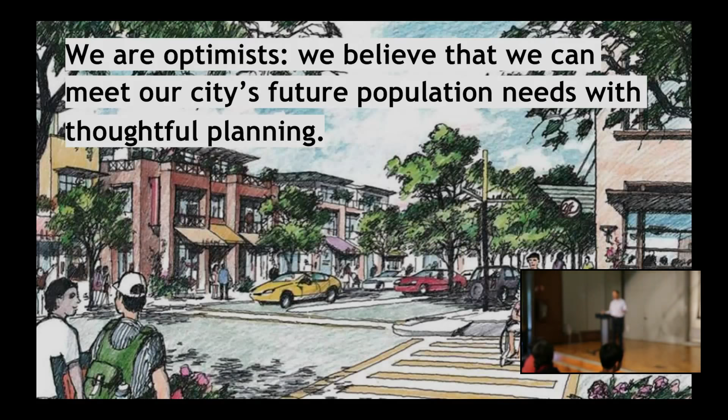So next, this is what we're going to talk about. Let's go forward beyond this. I just want to walk you through who we are. It's just a group of people from Palo Alto. We're optimists—we think that we can meet the future population needs with good planning. So again, anyone here that wants to get involved, is interested in an ADU, but also interested maybe in the broader environment, we are just a group of citizens that work on these things, and we think that there are solutions.

Go 2 more slides. 1 more. It's all right. So we host a lot of educational events. We host various forums, and we talk about policy. And finally, we're everyone—if you think about who's on our board, and I encourage you to go to our website and look, there's people that are retired, there's people that are just starting out, there are people who are really trying to figure out how to get their kids to stay in town, there are people thinking about how to start their own families and what kind of community they want to be part of.

So the final thing I'll say before kicking it off to the meat of this presentation is, when I was on the Planning Commission, this was an important topic. People that come to speak represent a lot of different views. Some are worried that the quality of their neighborhood will be decreased by having ADUs, more people. Some are excited because it might mean they can stay in place, or their kids can stay in place, or there's more variety. But it all happens because people show up and talk at council and talk to the PTC.

And so my final plug is, council was supposed to have brought this to their chambers this week. It didn't happen—there was too much stuff on the agenda, but it'll happen soon. So for those of you here who are interested in ADUs, everything from parking requirements to impact fees to tax assessments, all of this will impact the ability for people to actually get this done.

And so to the extent that you have opinions about this, you should make your voices heard. That's how things get done here. So I just encourage you to be part of this process. So if you signed in, we'll keep you informed as these things go to council or other commissions and where they're going. So with that, I'm going to hand it off to Amy, who's going to kick off our festivities.

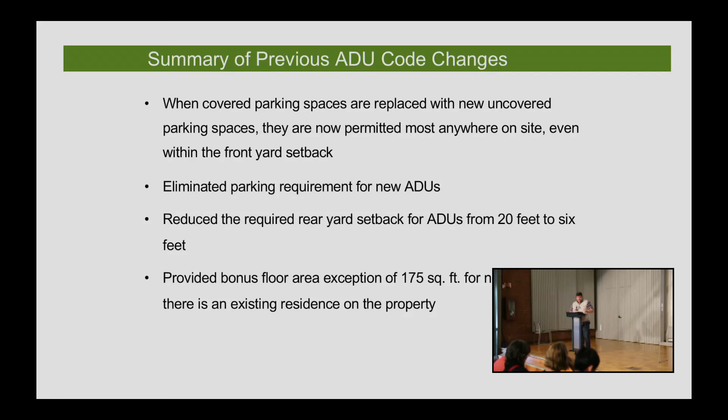A few more changes here. Significant increase in ADUs, these are the trends that we've seen since all of those changes were made. Since those changes were made about 15 months ago, we've seen 62 permits for new ADUs. Prior to that code change, we only saw about 4 new ADUs per year, and now we're seeing about 4 per month. That's about 48 new ADUs per year. So the increase has been pretty dramatic.

We don't know if this is going to continue at this rate. It might just be people that wanted to do it couldn't do it before, now the code changed, so they're jumping in on it. But hopefully this is a trend that continues.

So there were a number of clarifications that staff was looking for council to make as a result of all those code changes that took place last year. Those changes were supposed to go last Monday night, but unfortunately they didn't have a chance to get to it. But I'm going to cover for you what those changes are. There's a very detailed staff report that's available online that was on the agenda for last Monday night, and you can look at that, but I'll cover the highlights here.

So one of them was to clarify that ADUs may be established in all zone districts that permit single-family use.

Russ, we can't hear you. Oh, sorry. How about this? Better? Fantastic. All right. Better?

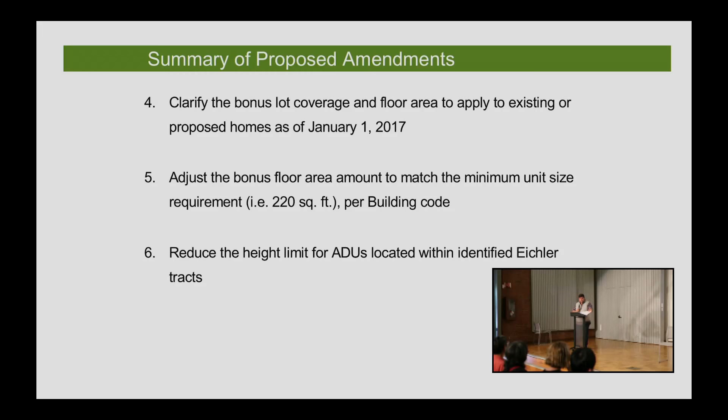Item number 7. So clarify that replacement parking provisions also apply to JADUs. Currently, the code is a bit ambiguous as to whether JADUs can take advantage of the same provision to eliminate the reparking that regular ADUs get to do.

And item number 8 is to allow replacement parking to be located within driveways located in a street side yard setback. The state code basically says that if you eliminate your parking, you can put your 2-space parking requirement anywhere on the site, and our code specified within the front yard setback.

But what about corner lots? A lot of times their parking is accessed from the street side yard. So we are looking to council to also include that specific language that someone could park in their street side yard versus only allowing them to put their parking spaces in the front yard setback.

Item number 9, allow existing driveways to be expanded to accommodate replacement parking. Currently, the language says that you can eliminate your covered parking and put your required parking spaces in the setback, but it says it has to be in an existing driveway.

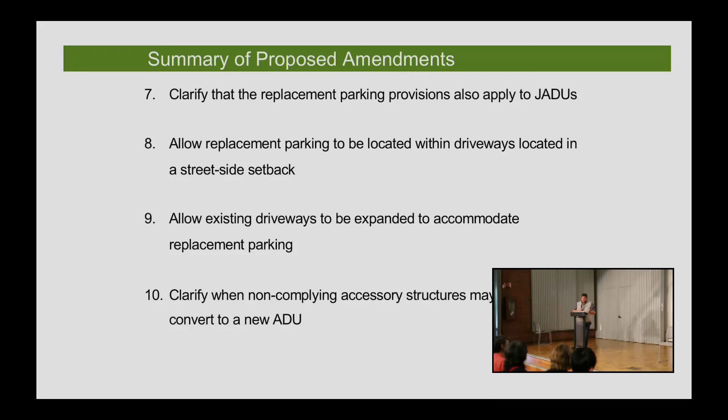Well, sometimes those existing driveways may not be wide enough or long enough to accommodate your parking, and so someone could do a workaround and expand their driveway before they do an ADU and then come back and have the space they need, or we could just amend the code and say that you can make your driveway work to accommodate your required parking. So that's the road we're trying to take, and hopefully council will go ahead and approve that.

And then item number 10 is clarify when non-complying accessory structures may be rebuilt to convert to a new ADU. So currently the code allows you to take a legally built accessory structure, such as a garage, a home office, a rec room, whatever the accessory structure may be, as long as it's legally built, it allows you to turn that into an ADU.

Many of these structures were built long ago and they do not meet current building codes. They can't be used as a dwelling unit without significant modification. Oftentimes that modification actually results in the complete demolition of the structure because it has to be replaced. Currently under the code, if you remove the structure, you can't put it back in the setback. You can't reestablish any height, floor area, setback issues that may have currently existed.

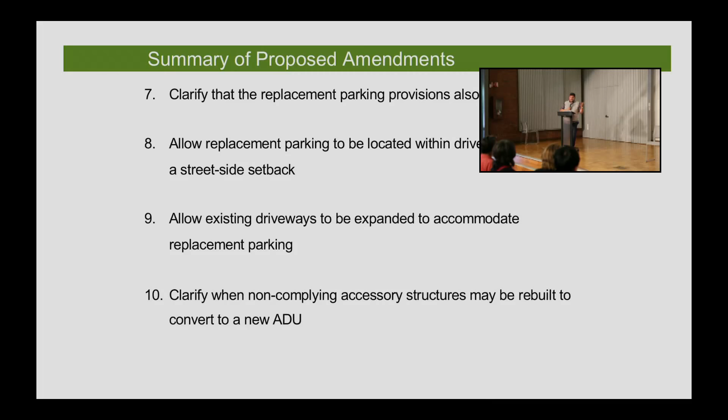So there's a conflict between this provision to try to encourage ADUs within these existing structures and the code that basically wouldn't allow you to put it back the way it was before. So we're trying to get clarity from council that they would allow people to go ahead and reestablish whatever nonconformity that accessory structure had, again, providing it was legally built when it was originally established.

Some other things that we're asking council to look at. The development impact fees for new housing can be fairly steep. For an ADU, it's about $10,000. So they're looking at ways to possibly waive or reduce those fees, and one of them was possibly putting a deed restriction such that you don't have to pay the fee, but then you have to subject the new ADU to being in an affordable housing program for a certain period of time.

Another option was to partner with an organization that can provide the funding, but again, in exchange for having the unit be in some kind of affordable housing program for a limited period of time.

Another item of discussion that people have brought up was, there are a number of illegally existing ADUs. People have built these ADUs in the past, or they buy properties that the former owner had converted either an outbuilding, a garage, or some other space into an ADU. And again, we're trying to encourage new housing, so we're looking at guidance from city council.

It's like, well, are there strategies that we could employ to potentially legalize or allow people to legalize those structures that are currently illegal? And there are different ways of looking at doing that through home improvement exceptions or some kind of discretion from the director to possibly allow that to happen.

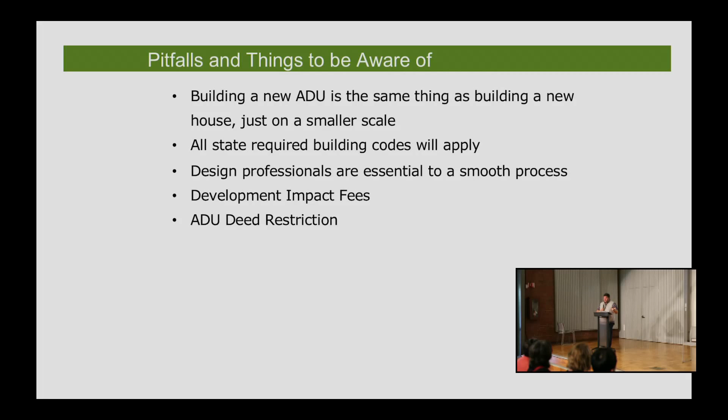That's basically my presentation. I'm assuming there may be some questions, so if you have questions for me, please let me know.

What's a JADU? So a JADU is interesting. We haven't actually seen one in the 15 months that we've been applying the new ordinance, but it basically entails the conversion of an existing room, a bedroom within a home. It could entail other rooms. J stands for junior, so it's a lesser or smaller ADU.

You don't have to have the bathroom in the unit. You can have a doorway from the JADU into the main residence where the bathroom would be. So the size, the fact that the bathroom doesn't have to be a part of it, and the fact that it has to comprise the conversion of an existing bedroom within the main residence, are some of the key points that distinguish it from a regular ADU.

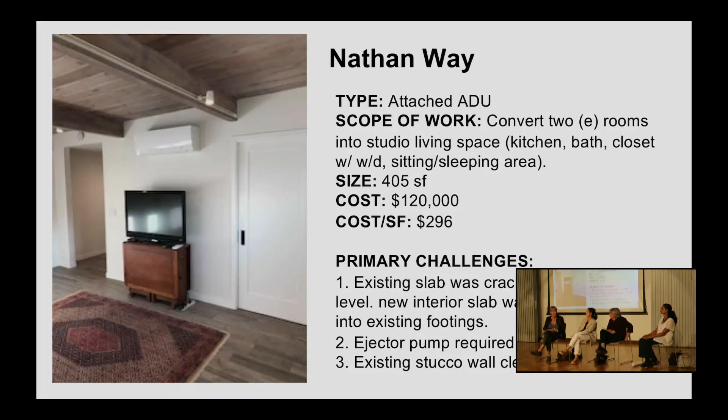The project that just started building, the 872 square foot detached building, is very much like building a house. I mean, it is a whole house - it's a kitchen and a bathroom and a bedroom and a living room and a little office and a storage area. And we are hit with green building, Cal Green Tier 2, yeah. That's the one that's starting now. Tier 2 means an outside consultant.

There's a Santa Rita Avenue? No, not Santa Rita, this is one that's in the design phase - it's the Cerrito Way.

That's a trapezoidal shaped lot, so that was tricky. But there was really only one place for this detached ADU, and that's where the old detached garage was. So we've torn that down, and this is where the ADU is going. But our other big challenge was the trees - the whole thing is under a canopy of a protected redwood. The property has redwoods on two sides, so that made our arborist critical in explaining to the city how we were going to protect the trees, the roots during construction, everything like that. Very grateful to Rob Weatherall of Advanced Tree Care, great guy.

The other problem we've had with this, and this is a problem I'm hoping is going to be addressed, is that most heating systems now come with air conditioning included, whether you're doing a heat pump or mini split kind of a thing.

When you're doing a detached unit, it's in the rear part of the property, and we're not allowed to put air conditioning condensers in the side or rear yard setback, which is tricky if your entire structure is in the rear yard setback. So I'm hoping that there's going to be some relief on that maybe.

Maybe Russ has some input on this. This is a really interesting scenario that you brought up. I've actually made an executive decision, and I've been approving the equipment as long as it's not in the 6-foot side yard setback for an ADU. I've been allowing them if the entire structure is in the 20-foot rear setback. If there's a portion of the structure that is not in the 20-foot setback, then it's expected that the equipment will be located adjacent to that point of the structure. But if it's wholly in the 20-foot setback and there's nowhere else for it to go, then I've been approving that.

The other thing that hasn't come up is that surveys are often required for these, because Palo Alto has become much more rigorous about requiring surveys when you're doing anything close to a setback. In this case it would be 6-foot setbacks, but it's happening in additions to main residences also. Used to be, if the fences were in good shape, they were kind of assumed to be the property lines. But nowadays more surveys are being required, which can be a $3,000-$4,000 item. So there are soft costs associated with all building projects, but some of these ADUs get hit with all of them.

It's expensive. And next we're going to talk about the Santa Rita project.

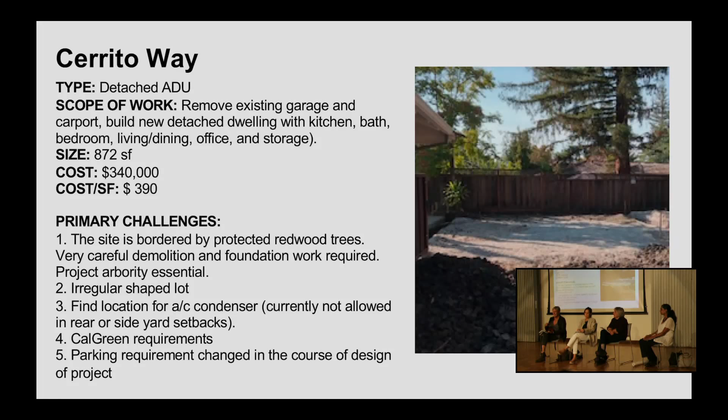The Santa Rita project is a house and garage built in 1928, with a little detached Tudor-style garage. It's only 270 square feet, and of the projects, it could actually end up being the most expensive on a per-square-foot basis because it's a lot of bathroom and kitchen—which is expensive square footage—compared to the amount of just walk-around area. But we're just in the early stages of that.

We'll have an air conditioning unit problem, so we have to deal with where we're going to put that. But it's got a high roof ceiling, so we can put some skylights in. It'll be a cute little space, but the other ones are more usable for living.

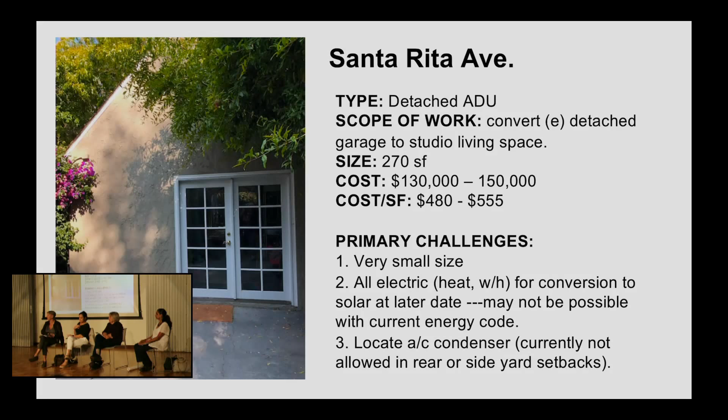Thank you so much, Kristen. That is just so much information that you shared with us—it's really nice. And next we are going to go to Sanchali, and you also have an ADU that you are going to share with us.

Hello everyone, my name is Sanchali Srivastav. I'm owner of San Interior Design, and I'm basically a designer. I've done a couple of ADU projects, but only one in the city of Palo Alto, which is right now in the permit process. We've been through the first set of plan check comments, and now we are going to submit for the second review.

And I'm also a certified interior designer. I have done a couple of other ADU projects already built in other cities. Some of them were converting existing space of the house into an ADU. One more project was attaching a new ADU to a garage space. This one we're doing in Palo Alto is a 900 square foot ADU, and it's a detached structure, so it's a new construction project.

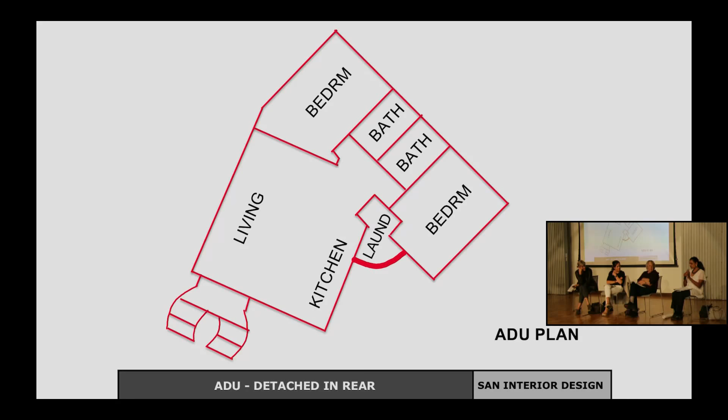One experience I'll share about this project we are doing for the ADU: initially when I took the site measurements and started laying out in CAD, I noticed there was something off in the site dimensions, because from the county records, when I superimposed the parcel map, it looked like one of the property lines was probably off. Now, I could not tell without the survey whether it was left or right, which one, because we were going to place that ADU in that corner.

So it was critical to know, if we are leaving like 6 feet from the property line, where that property line is. So after we had the survey, it was determined that the right property line was off by 10 feet. So, fortunately, the fence was into our lot. That means that the homeowner had like 10 more feet into the neighbor's property.

So, as a result of this, the homeowner actually took that survey to his neighbor. And he said, here is the licensed survey, I have 10 more feet of space, so I would be moving the fence into that part. So that the neighbors... one day, my client just brought the fence guy and moved it over. So now he is enjoying like 400 more square feet of space, and you can imagine what that does in Palo Alto, all that land space, right? So that was one upside.

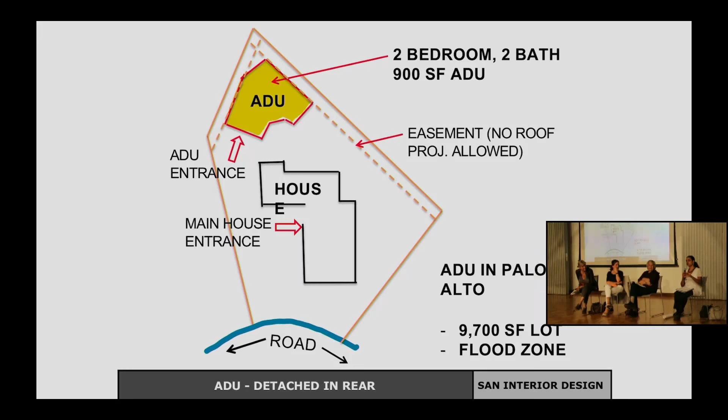But the message I want to give you is, if this property line was actually anywhere close to the ADU area, if it was going to be off, the whole design would have changed. So the message that I want to give is, do this survey even before you start the design, because these property lines become so critical in the design, especially if you're going very close to the property lines. These property lines can be off by a big margin, like 10 feet is a big thing.

That's big. Yeah, I've had like 4 feet also in Palo Alto. One of my clients is sitting here, and his property line was off by 4 feet. So, yeah.

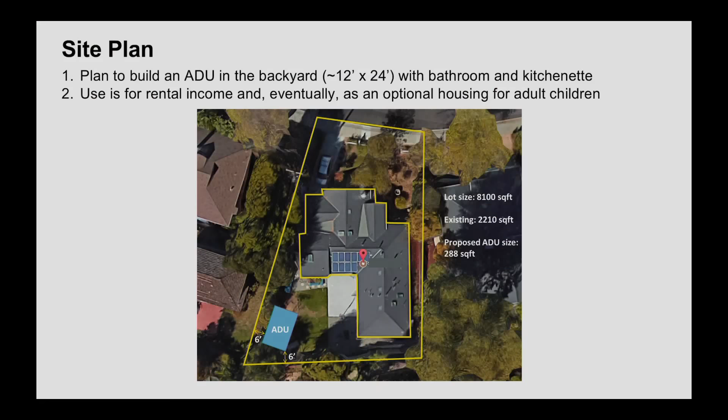So originally, he found somebody who can do this prefab, and that is from Canada. And he started a process with them and found out that it's very attractive because all the construction will be off-site, and then the house is pretty much done, and then you bring it on-site, and that sounds very exciting. He went along with the process just to find out that particular supplier was not California certified.

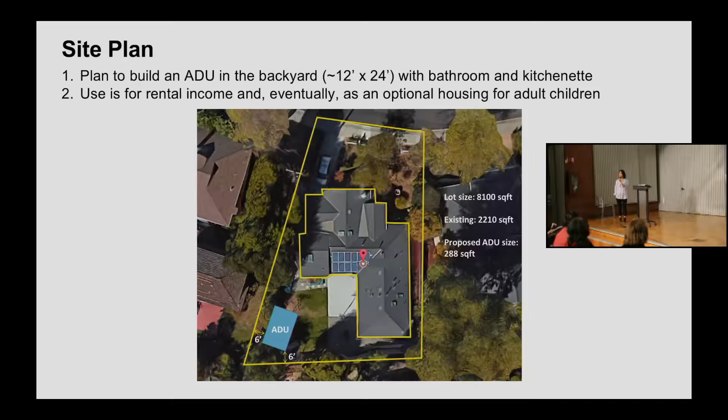So what he did was he went with his third and final option, and that is he found a company that has been building backyard sheds. They are interested in expanding their business, so they have been helping their clients to do ADUs. They have a design staff, and they'll help you start with the planning of the design. And also they have a dedicated staff to help along with the permitting process.

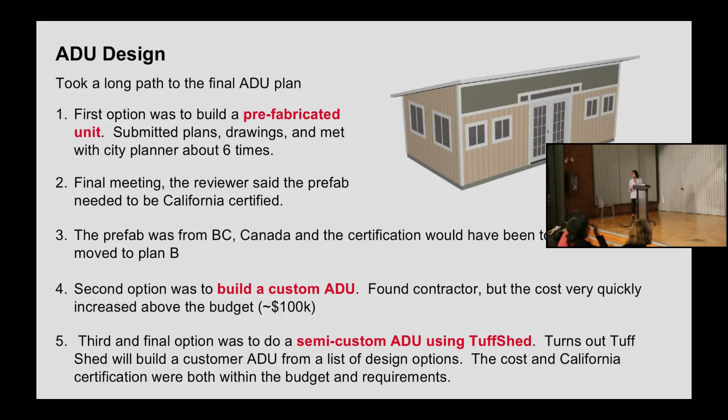And the good thing is that this company, because they have been in business for so long, they have been certified. So that answered all the questions. And so in the end he found a contractor that helped him build an ADU. The ADU is about 288 square feet, and it stayed within his budget, less than 100K. So he's very pleased. The process is that you have your site prepared, you hire your own. So pretty much, if you're a DIY kind of person, and you have the time and the energy and pay all the attention to go through the process while driving the process, that is doable.

Have the foundation laid, and this house that is built offsite will be delivered. And they need only 3 days to have it anchored. And anchoring is a huge, huge issue. And it was pre-approved, tested. After that, you'll hire separate contractors to finish the house. So you do the sewer connection, and then your plumbing, and your electrical, and all that. After all is done, he has a small ADU in the backyard and stayed within the budget. So this is one of the options, just thrown into the options. So that will conclude our program tonight.

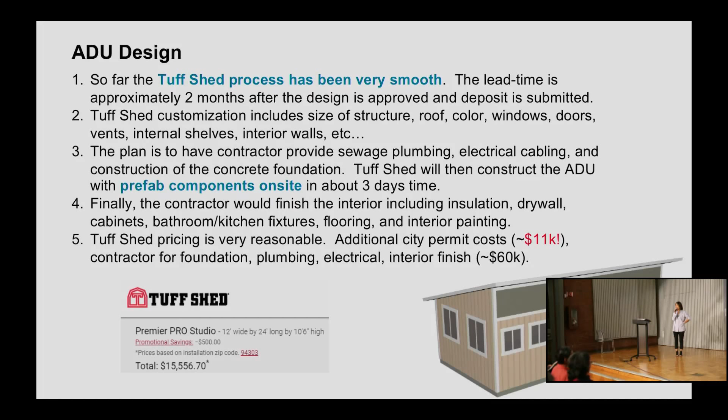This project has been all the way through the city process and is approved and is going forward? Yes, actually it has been delivered and has been anchored, and he is now taking his time to do the interior design. And he said it's really, really nice. I asked him, what are you gonna do with a 288 square feet ADU? So the thinking is that they are going to offer it to maybe Stanford students while they are here, and his own children are off to college now, but if they intend to come back, maybe this will be a starting point for them. But in the meantime, it'll be used as a rental and income generating ADU. So this is a happy story from one of our owners.